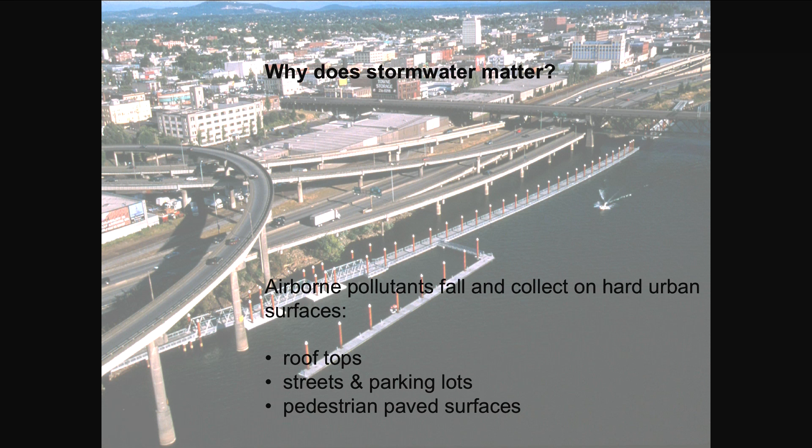So we always ask ourselves, why does stormwater matter? One person mentioned that airborne pollutants that fall on surfaces, maybe roofs, are cleaner than streets. That's definitely true, but I contend that airborne pollutants fall on all urban surfaces—rooftops, streams, streets, parking lots, paved surfaces. A good example is your car: if you go away for two weeks, you washed it before you left, you come back, it hasn't rained, and it's covered with sticky stuff and things that have fallen out of the air.

Some places are more dirty than others from the air quality. This isn't the picture postcard for Portland, Oregon, but it is Portland. Freeways and all the rubber and airborne pollutants that come off fall onto rooftops in these urban areas. So we don't take those rooftops for granted—we feel like those need to be treated as well. I want you to make a mental note: this is a project I'll show you a little later, and you won't see the context of it next to the freeway in my photographs, but just remember that's what's there.

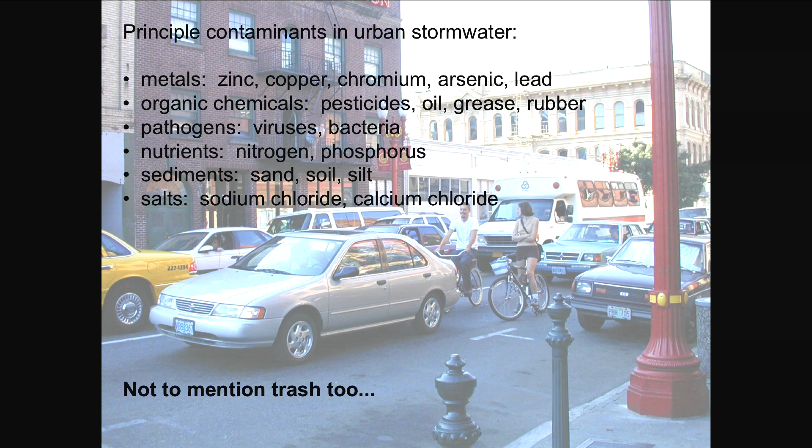When I teach stormwater classes, I always remind everybody of the principal contaminants we have, none of which are particularly pleasant to deal with. Some are in greater quantities than others, and not to mention trash too. When I talk to students, I say you'll never look at a catch basin the same way after I'm done with you. You'll never walk past one without seeing those pools of oil and the pretty colors, the sediments, and all the junk that goes into our rivers—most of it untreated.

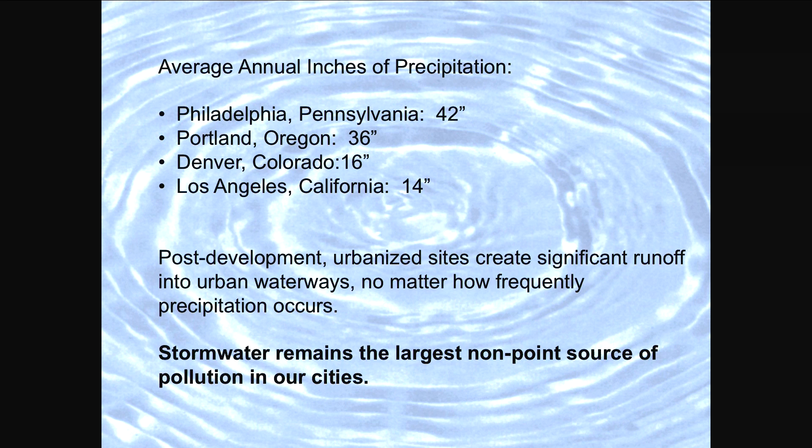Coming from Portland, people always say, well, no wonder you have so much stormwater out there, you've got so much rain. Well, in fact, maybe we don't have as much rain as someone might think—maybe Philadelphia has more, I got it off the internet so it must be true. But we also know that Denver and Los Angeles have far less rain than Portland, yet I say, are your streets any cleaner than ours? Yours just don't wash off as often—you're not as reminded of water as we are in Portland, Oregon. So we were a little more proactive at getting there in terms of dealing with it.

We have endangered species of fish in our rivers, so we're taking this all very seriously. Stormwater remains the largest non-point source of pollution in our cities, according to the EPA.

As a firm, we've always looked at how can we best integrate the science and art of stormwater design, and how can we apply artful stormwater to a variety of projects. I'm going to go through these quickly because there's a whole host of projects coming up, not just a few—try to imagine the different circumstances under which we're working on behalf of stormwater, both storage and delay of the water post-storm, and also the water quality.

Each parking area has bioswales, and we weren't really sure what to call them. Were we calling them bioswales in '96? I guess we were. And so we designed them. We made the water run downhill. We worked closely with the civil engineers.

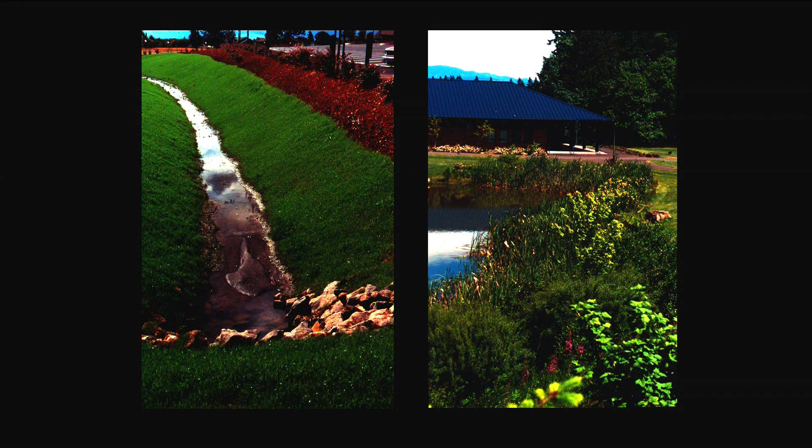So we took this assignment very seriously. The first thing we did was, I believe we called it a grassy swale. I remember standing out there after it was done, and we looked at it, and the former farmer who owned the site was there, and the civil engineer, and the owner, and the maintenance people, and we looked at it. He goes, 'That's nothing but a damn farmer's ditch.' And I said, 'Well, actually, you're right, it is.'

But look what it's doing. It's really capturing that sediment. And now this is overgrown with lots more vegetation, as you can imagine. But it was, excuse the pun, a watershed moment for all of us to realize that this technology is not new, and farmers have done these sorts of things for years.

And then this is an example of putting that wet pond right in the middle of campus, where everybody sees it, where it gets good maintenance and it gets a lot of attention from students, and particularly the biology students.

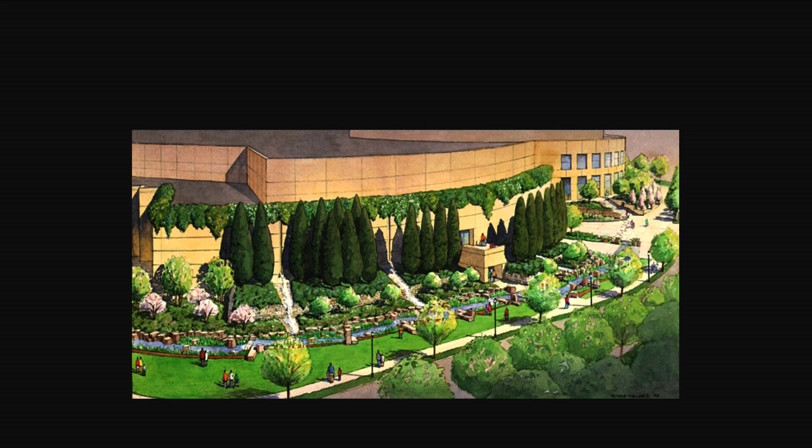And this is the Oregon Convention Center. This was early on our idea that you could put an ordinary landscape in here, an ornamental landscape that would be quite lovely and might get it through the design commission, but that we had a bigger opportunity here to really create a vision for treating 5.5 acres of stormwater.

So this is the building, this is the expansion, and there's actually 5 different watersheds that work off of this building, and some have to come a long way around. And then they enter a series of ponds down through here.

So here's a little rendering. There's an area where they start coming out here, and then there's 9 ponds that work down. There's several different places where the water enters the system.

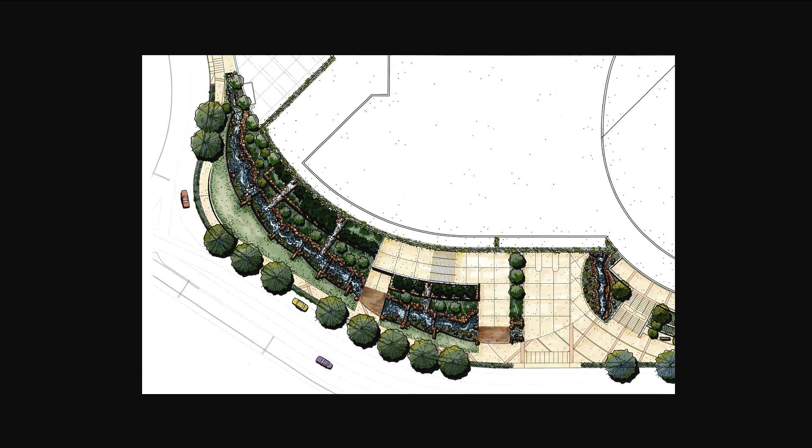And feeling like the regional plants and the regional stone, the beautiful basalt that we have, could really be featured in a place that visitors and residents come to alike.

So this was the largest rain garden that we had done, sort of the biggest disconnect-your-downspouts project that we'd ever attempted to do. And I think for the most part, it's gotten a lot of good critique. It's been published a lot. A lot of students come and want to know about it. We take tours of it all the time.

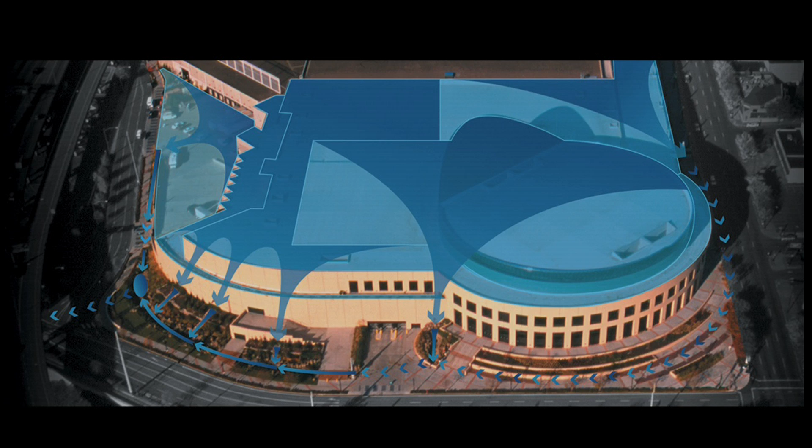Our first notion was to run that water away from the building first, because we didn't want any flooded basements. We didn't have any notion that parking garages, subterranean parking garages would be filled with our stormwater. So we were pretty careful about what we did.

But the architects were great about featuring scuppers, and the stonemasons were wonderful, and you can see the kind of regional representation that people can learn about the Northwest when they come to a place like this.

And almost all of the water infiltrates into the subgrade through these settling ponds, and we really find some of the compositions quite lovely, and there's even more vegetation now in there than there was when we started.

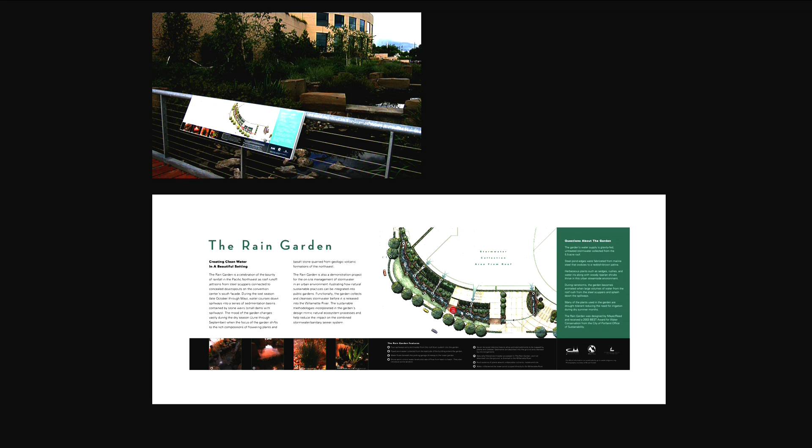And then the interpretive part of it we think is really important so that people learn from this. It's visible, they can see it, but they need to learn. I'm going to move quickly here.

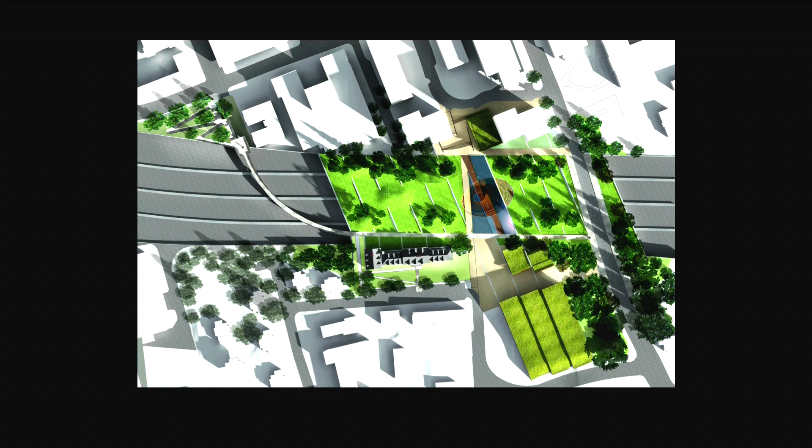In terms of the goals of dealing with traffic, enticing people to ride more bikes and walk, we looked at precedents such as this one in Salt Lake of Olin's work at the LDS Church, bringing these things together and creating a large cap over a freeway was a really interesting design challenge. Putting a piece of art up in the air was pretty exciting too.

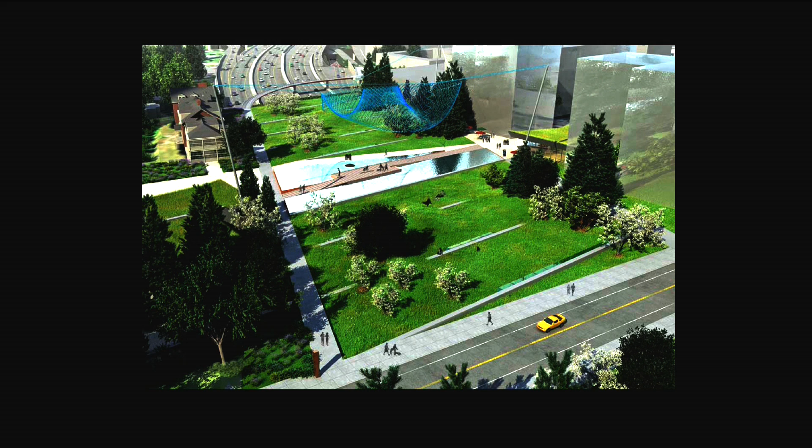So this one is not built, nor will it be. But anyway, it was really a great time to start to integrate these ideas of meadow and thinner landscape spread out over a cap and a lid over a freeway, to really join the downtown of Vancouver, Washington to this park that's across the street.

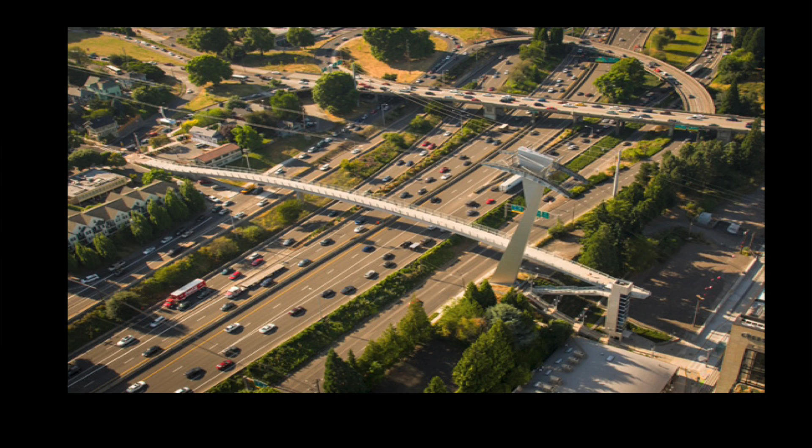This is a recent project where we were on a design team for a pedestrian bridge. If you've been to Portland and seen the aerial tram, it's right here, and this is right beneath that. This is a pedestrian bridge that connects down to the South Waterfront district where those other two projects were.

One of our jobs was to take the amount of stormwater that starts about here and comes off of this deck, which isn't particularly clean because you can see what's going on here—all the particulate from the freeway is rising up off the surface and landing on places like this. So it's pretty dirty water.

And when the bridge comes across—this is just a pedestrian bridge—it's still 60 feet in the air because they couldn't curve the bridge large enough or arch it far enough to be able to meet grades.

When you come across and come down the stair, you start crossing a whole series of weirs that are tracing down the slope, and you can take the stairs or you can take the elevator.

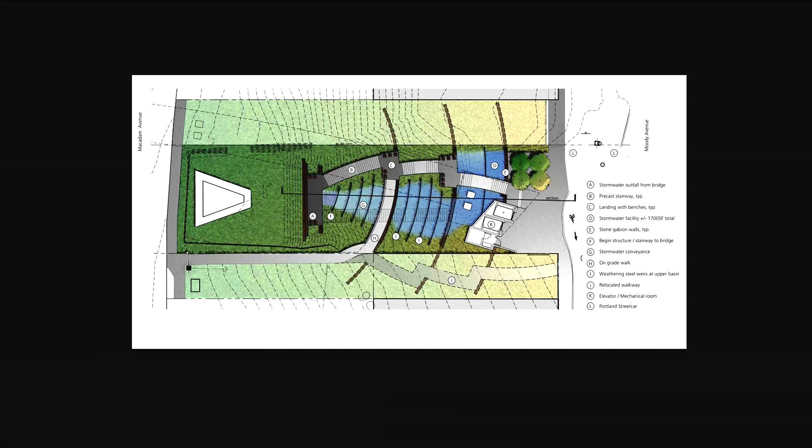It's a really interesting way to experience the water, and it really has a lot of visibility when it runs. It moves through the system fairly fast. There's not a lot of retention, but it's really kind of a fun project.

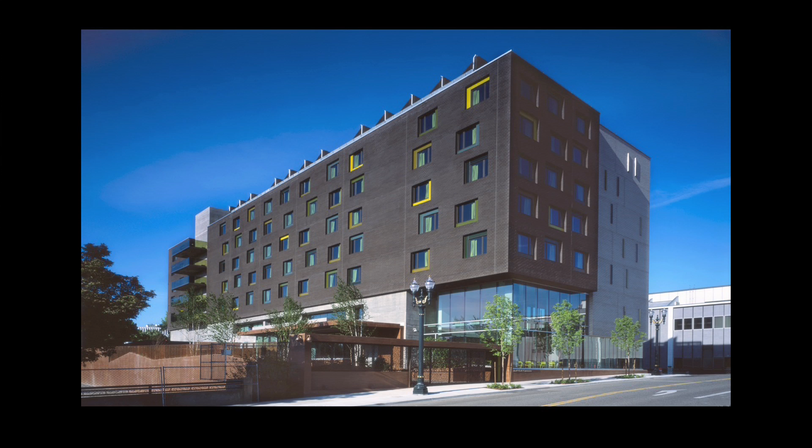Lastly, the Bud Clark Commons is a new building in downtown Portland right near the train station, a transit mall, built for three purposes: to provide day services to the homeless, and then there's a men's shelter where homeless men can come and live for 90 days while they're looking for work. They have to be clean and sober.

The ones walking into the day center are, you can imagine, in all kinds of states of mind and states of physicality. And then in the top area, they rent out single studios to very low-income people or no-income people.

You're probably wondering why I'm showing you a project like this, but our design for the day center is right here. We designed it sort of like an outdoor room where people come in, they queue up in this space, and they walk through the gate.

Here's the entry gate, and they can put dogs or bikes or possessions in lockers over here. And then they come in and get a number underneath that canopy, and they reside in this courtyard to wait for services.

They might need to make a phone call, they might need a shower, they might need to develop a resume, they might need a form of ID. You can imagine all the kind of misfortunes that have come upon people who are coming to this facility to try to make a change in their life.

This is LEED Platinum, and we had a great team of architects and engineers who wanted us to work quickly—excuse me, I'm trying to speed my presentation up—on how we could integrate stormwater and stormwater treatment into the building.

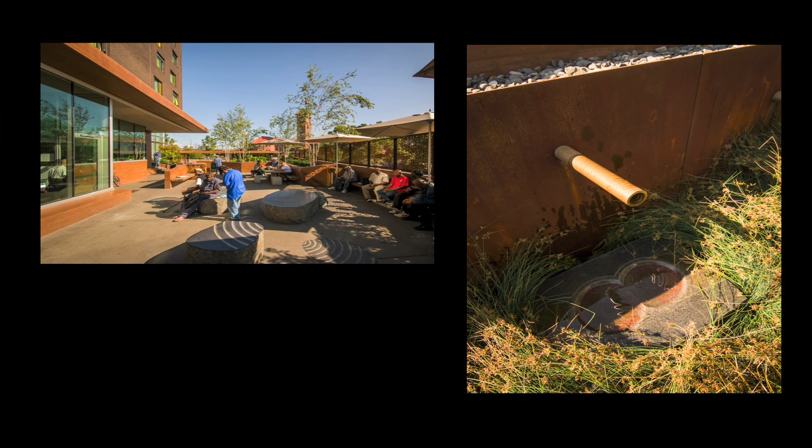This is the area where the stormwater is coming through, getting treated by plants. And then I just wanted to show you this, that we worked carefully with an artist who does stonework, who developed these splash blocks for a series of pipes that release the water into the planter.

This gives you an idea of what kinds of facilities you can put out there, attempting to give some dignity and respect to people who really are trying to make a change in their lives.

I was asking Steve earlier about the acoustic qualities of the space he designed at 10th and Hoyt. It's really interesting to introduce that in there, because from a seasonal standpoint, you're getting this play of water into these small private spaces, and it's really quite an effective tool.

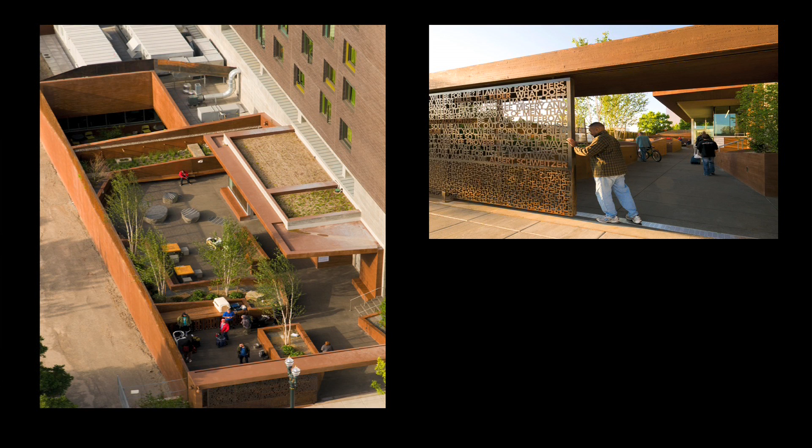It's had a calming influence. The people who worked there said the group sort of comes in and they don't fight, they don't have as many conflicts as they otherwise might. They seem to have a meditative atmosphere created for them, which is very helpful if you're trying to make a change from life on the street.